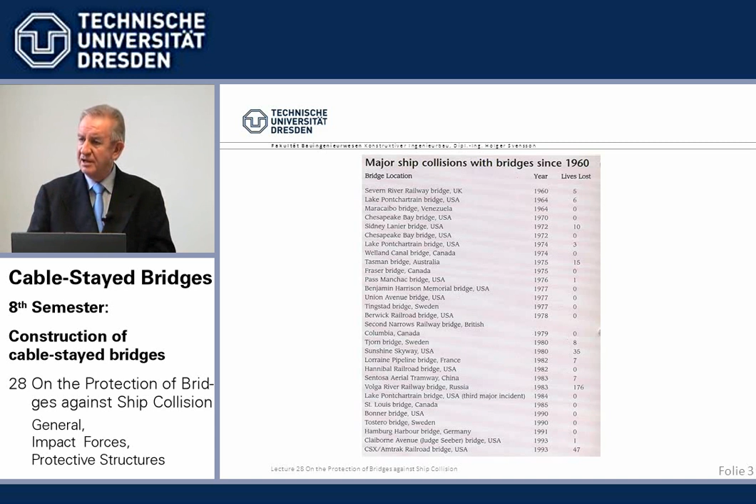Recently, when we were designing the bridge alternate for the Fehmarn crossing across the Baltic Sea, the main bridge, this was a main item, and they had very high forces there, as Pedersen will show. The design was quite a bit driven by ship impact conditions right in the middle of the Baltic Sea, just as one example. So we have to take this very seriously.

The main item, of course, we want to know what are the forces we have to design the pier against. When I came to this business in the early 80s because of the Zárate-Brazo Largo bridges in Argentina, we'll see an example. I looked into the literature and found there's nothing, virtually nothing.

There was Minorsky, who, for if two ships run into one another, calculated a force proportional to the volume of the deformed steel, which may be very nice for shipbuilders, but we poor engineers can't do much with that. There was nothing.

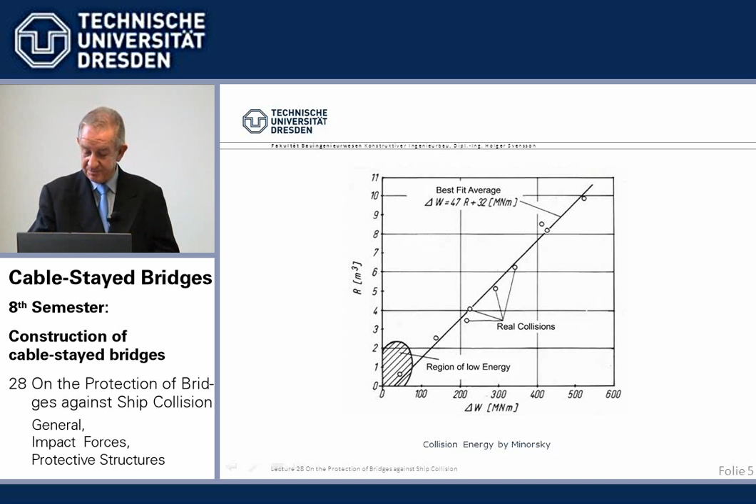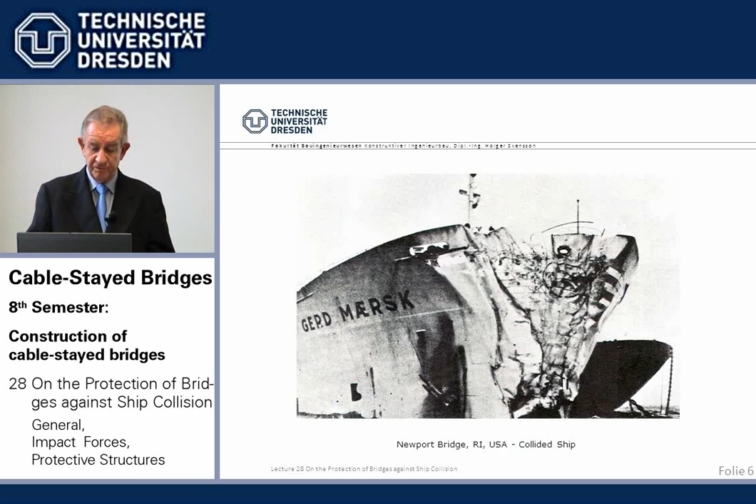As a typical example, I take the collision of the Newport Bridge, Rhode Island. We see here the heavily deformed bow of the ship, and we see here the slightly spalled, damaged pier of the Newport Bridge.

That's a major suspension bridge. Very sturdy piers. The bridge survived, and the ship at least didn't go down.

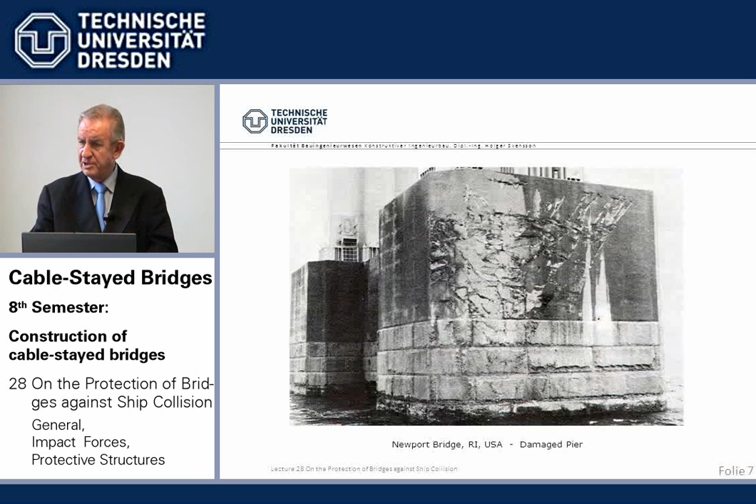And now, for this typical situation, a steel ship which can have plastic deformations and a very rigid pier, we'd like to know the impact forces. There was nothing.

It so happened that I came upon publications in my hometown, Geesthacht, near Hamburg, where the atomic power ship Otto Hahn was designed. At that time, in the 60s I think, they wanted to have commercial ships with atomic power stations. Didn't work out later, but anyway. For these atomic ships, one had to design some protection for this atomic power station.

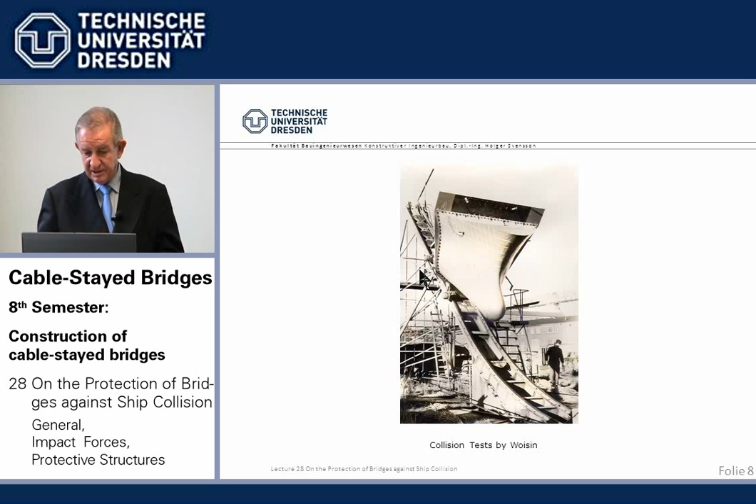There were tests made by Mr. Woisin, whom I got to know very well, at the Howaldtswerke I think, in Hamburg, with models. You see the man here, and those were heavy, expensive models. They were let down an inclined plane with a given speed, and the impact forces were measured. Lots of publications, and something like that always came out.

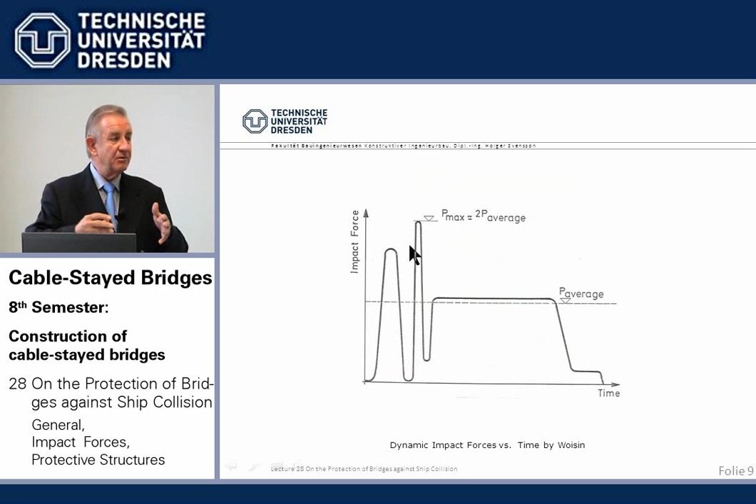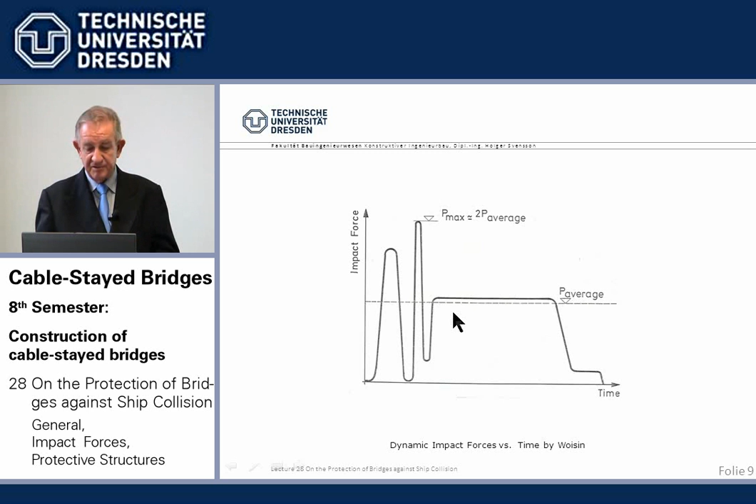There's first a fluctuation, a very, very short period. Basically, I say that's the pre-buckling. Before the thing buckles and so on, it stiffens up, but it's very short. Then, for a longer period of time, we have the average force. And that's where we all decided, yes, that's only a dynamic effect. We have to design for the average force.

How big is the average force? Then, with my simple mind, I looked into the results and sketched something and came up with the relation that the impact force is proportional to the ship size, deadweight tonnage, measured in deadweight tonnage, simple, with some factor there.

That was it. And then I said, okay, we use this formula, and then of course we have a certain scatter, because it depends on the make of the bow of a ship, whether it's very stiff—take a warship, a very stiff bow—or whether it's very soft, say an oil tanker.

So we said, from all these tests and what have you, and Mr. Woisin, who was a ship engineer, helped me there a lot—we said, okay, this plus or minus 50%, depending on the type of ship. Beautiful. And that gave the first formula to give something.

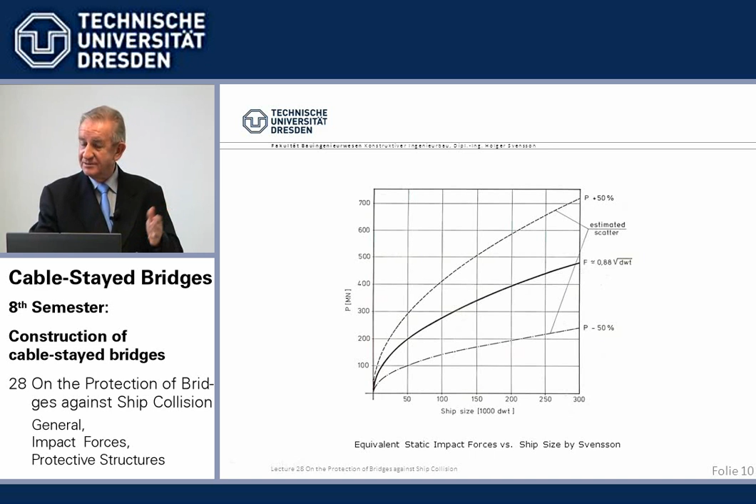And then we worked together in the United States on AASHTO. I was on the AASHTO committees and so on, and my good friend Mike Knott became in charge. And then they said, well, this plus or minus 50%, that's all too difficult. We use the 70% fractile, and then we have that all well covered. I don't believe it, but okay, it's easier to calculate, I agree.

So then the formula became 0.98 instead of 0.88 times deadweight tonnage, which is basically the AASHTO formula.

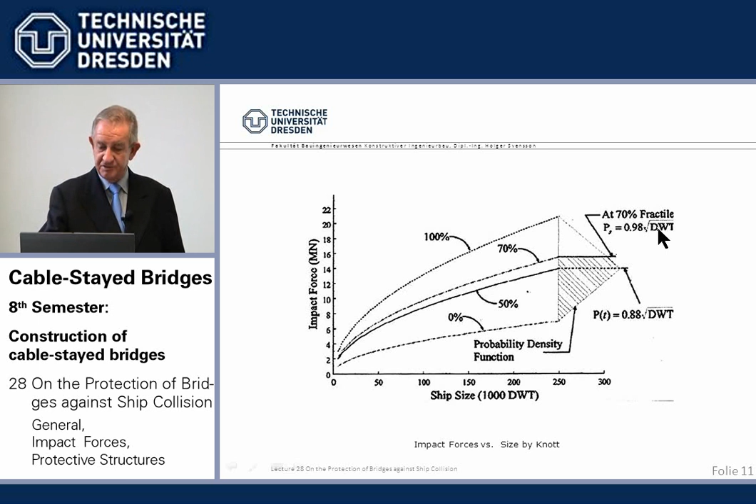And there are other formulas taking into account the speed. The speed of the ship has a little influence, not very much, because the bigger the impact force for a given ship, the longer is the plastic area of deformation. The work which has to be done—there is kinetic energy which has to be killed by inner work of plastifying the steel.

The old Eurocode used basically the same approach. Then Mr. Pedersen came up, I think in 1983, with some theoretical calculations, and he came up with double. So there's a big discussion today about who's right, AASHTO or Pedersen. As usual, people are careful, and the old Eurocode switched from what we did for AASHTO to Pedersen.

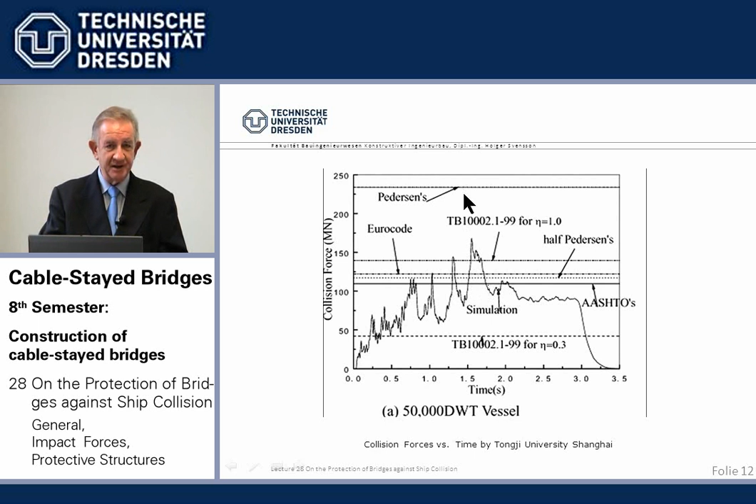What Tongji did, they modeled this type of ship's bow with all the decks and everything, and they modeled the bridge pier, and that was the outcome. Looks not unreasonable to me.

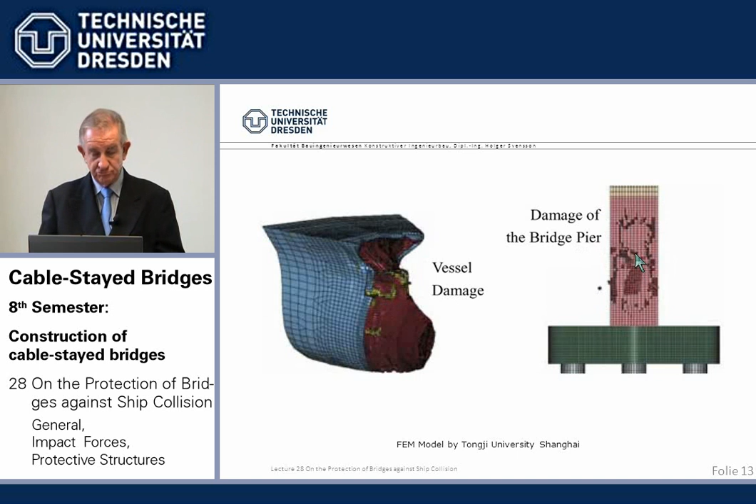Now they evaluated that for other things. They said, for example, well, good enough if we have a real solid wall, like I showed you for the Rhode Island Bridge. But normally the piers are a little bit flexible. What happens now if we add a parameter, flexible piers instead of rigid? Here we see a rigid wall would give these forces over time, and certain flexible piers at the pile cap would give, at the peak, half of that.

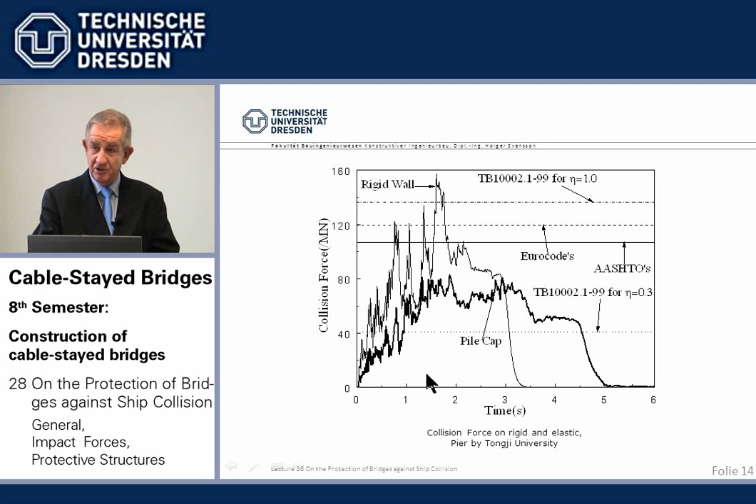So it's quite important, if you want to reduce the forces, to take into account the flexibility of the foundation, especially if you are on high piles. If you have a solid pier on rock, not much giving. But if it's on long piles, it helps. Every little bit helps to keep the price down to win the competition. That's the name of the game we are talking about here.

Then the other thing which I briefly indicated in the beginning, the time period. We have here one local peak, then we have a local mean peak, and then we have a mean over time, a general one. We decided, basically, at that time, to use the mean over time. And you see already, if you say no, we use the peak instead, then you are where Pedersen is against what we have. So it's open to interpretation.

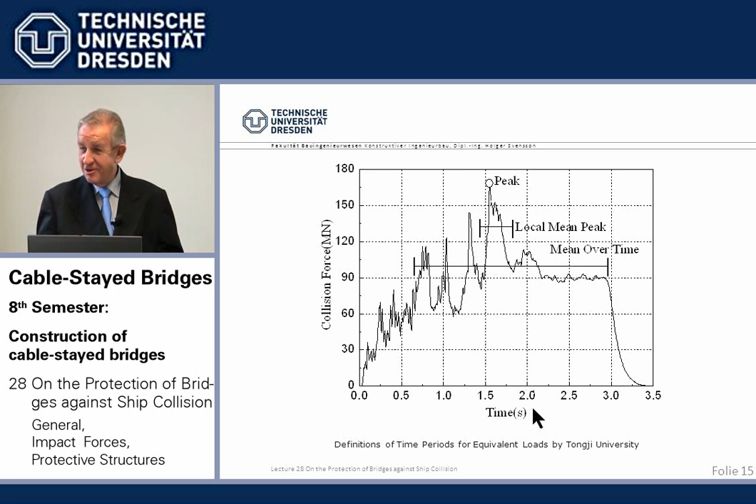And if you compare, taking impact velocity into account, collision forces, and see the difference between the absolute peak, the local mean peak, and the global mean peak, there's already a factor of 2 in there. And then if you compare the old Eurocode and AASHTO, well, I would say, taking into account that we don't know what type of ship is hitting there, it gives us at least an idea what forces to apply, and it has to be specifically stated in the tender documents.

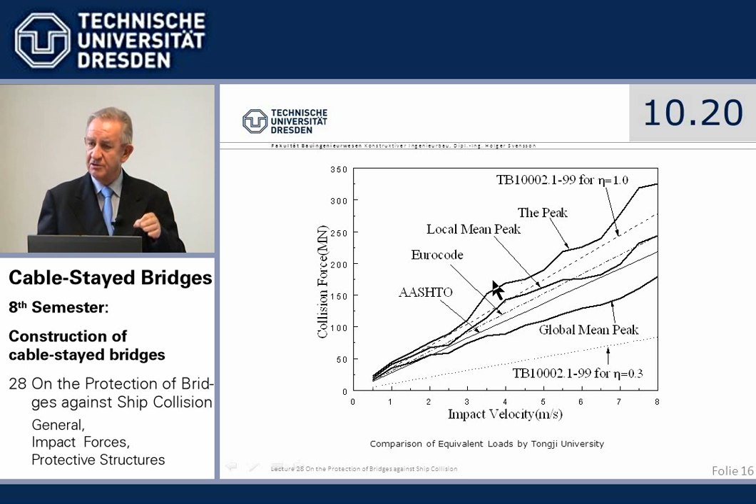Once we have established, in a way, the impact forces, then of course there come in all the probabilities and things like that. I'm not going into that. That's in, for example, AASHTO and other codes.

What can we do about it? How do we protect our bridge against the consequences of ship collision? First of all, highly recommended, place the bridge and the piers out of reach. If the ship can't reach the bridge, it cannot do any harm. Simple, isn't it? An example: the old Tjörn Bridge in Sweden, an arch bridge, 278 meters, nice.

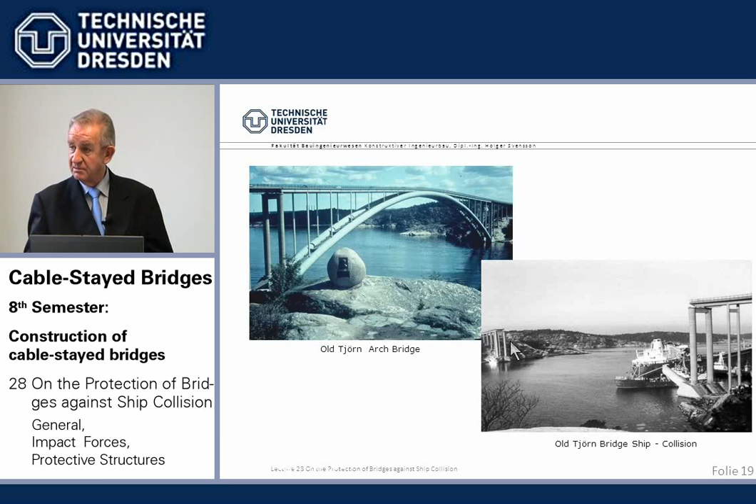However, a ship could reach the arch where the arch comes down. Well, that's the old Tjörn Bridge, and in accordance with Murphy's Law, what can happen happens. There was a ship running into the arch and taking the whole bridge down. No. Okay, now we've learned that.

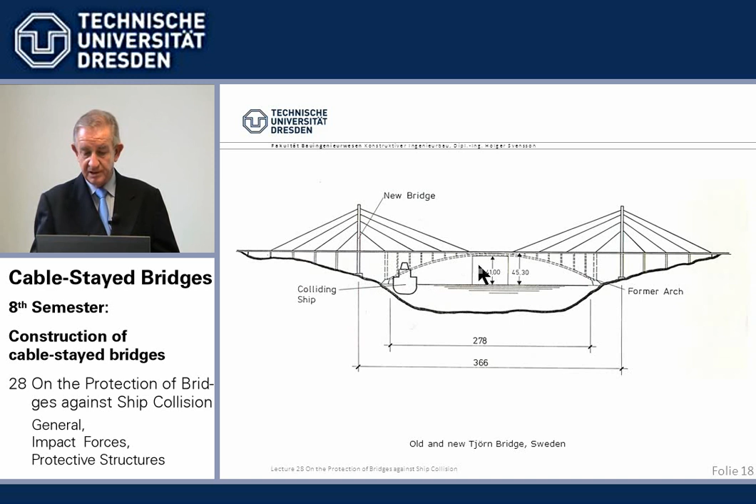So we place the new bridge out of reach. We use a cable-stayed bridge with piers safely on land, and you see that the same ship cannot reach any part. This is the new Tjörn Bridge, done by Krupp. Our alternate wasn't successful.

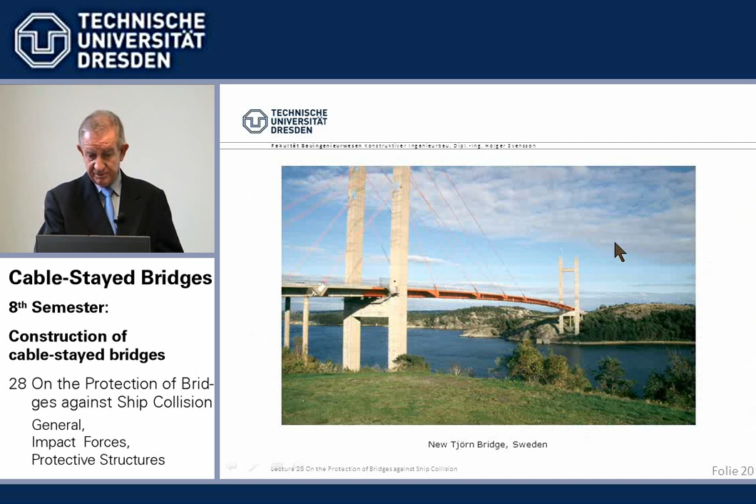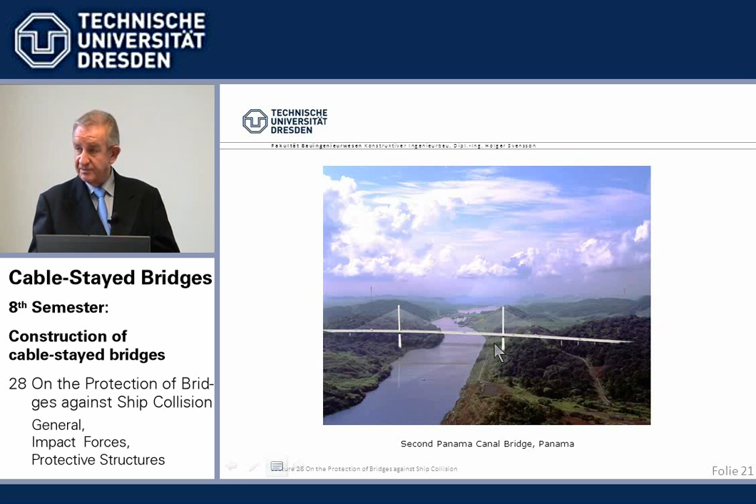Another of our bridges, the second Panama Canal Bridge, of course a bridge across the Panama Canal. There's one overriding consideration: thou shalt not hinder the ships in the canal. Nothing else interests the people who run the canal, who pay for the bridge. So it's very high, very far away, even accounting for the widening of the Panama Canal currently under work, so that it can be taken up easily. High enough, wide enough, so no ship in the Panama Canal can reach the bridge.

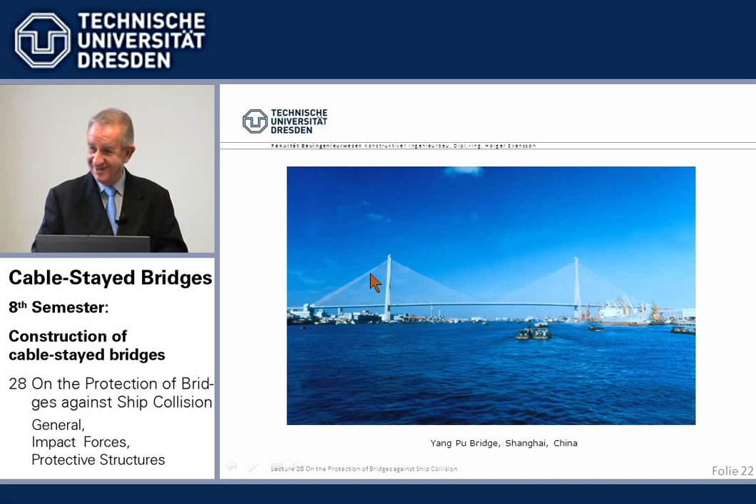Yang Pu Bridge, Shanghai, was a world record at 602 meters in 1994 when I was checking that for the World Bank. The 602 meters came from the condition that no ship must be able to reach the bridge. We wanted it out of the navigational channel, out of the water - think of the drunken sailor. So that's where the 602 meters came from, and here we see the foundations being built, with also a little seawall against it.

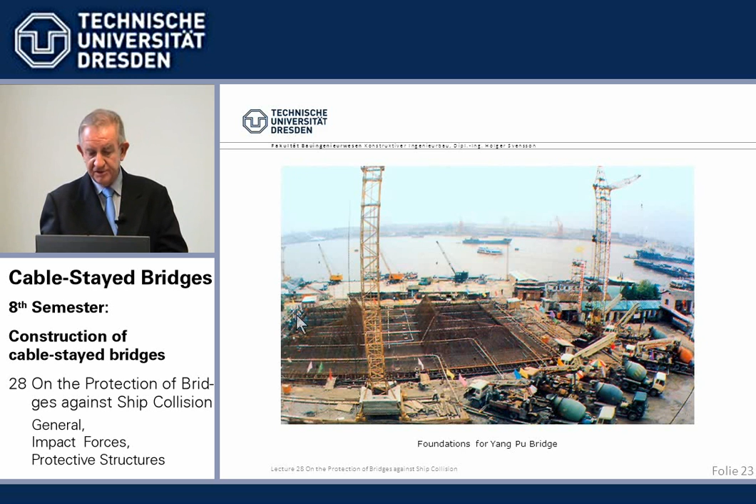Stonecutter - not the one you know, but our design, which came up second. It still hurts, we would have liked to do that. It's a nice bridge.

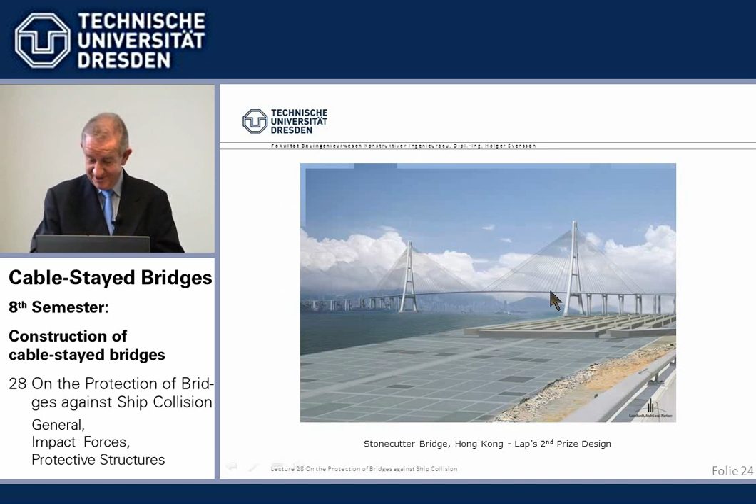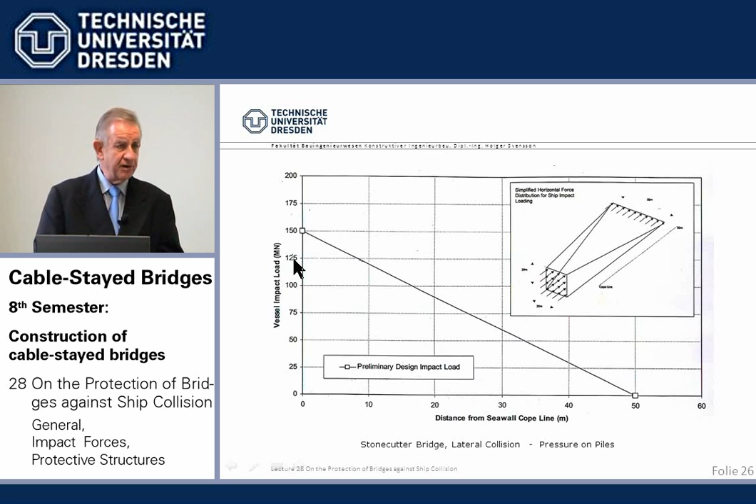Looking there, we also had a condition: you can put it ashore, close to the shore, but not in. It's on piles. Now, what happens if a ship runs into the seawall? Well, you can do it with finite elements, and you find a certain force being exerted through the soil, the seawall, onto the foundation. It's nothing really serious, but it had to be shown - it was in the tender documents, so it was investigated.

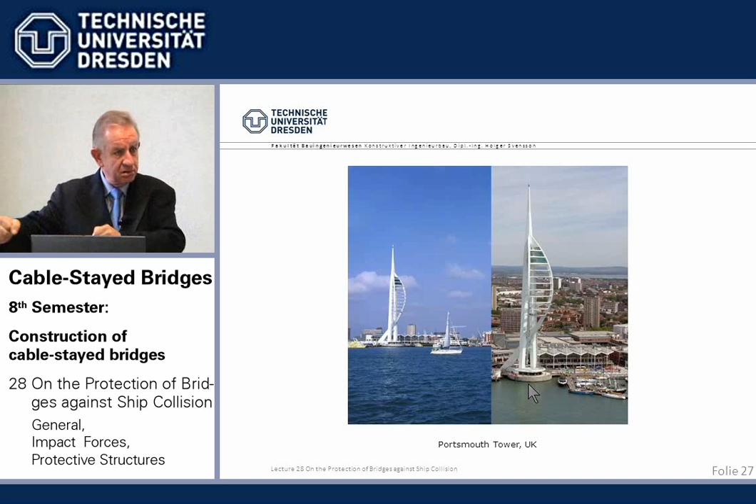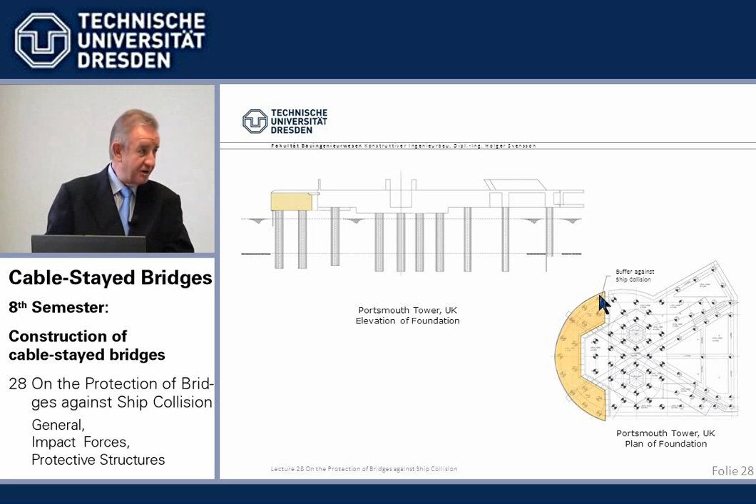Well, it had to be more or less in the water, so it could be reached by ships, and especially there are some ferries running to and fro. Even if a ferry loses its steering wheel or engine power and is drifting under the wind - ferries are high, we don't like that. So what was done was: we make an independent protection in front here which can deflect, making this sort of a buffer. So even for a building, that's why I brought it here, it may be necessary - if it can be reached by ship, we have to protect it.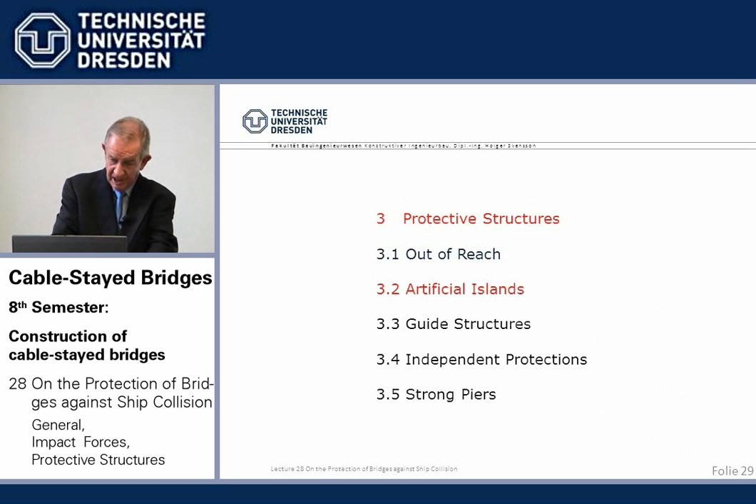So, out of reach - we put the foundation out of reach, but with an artificial structure. The next possibility is artificial islands. If we can't put it on land, then let's put the land around it, if possible.

Here is an example, the Houston Ship Channel crossing - you've seen that in detail. It was possible to place this artificial island around. It works very nicely; if you put riprap stones on top, it holds for a long time.

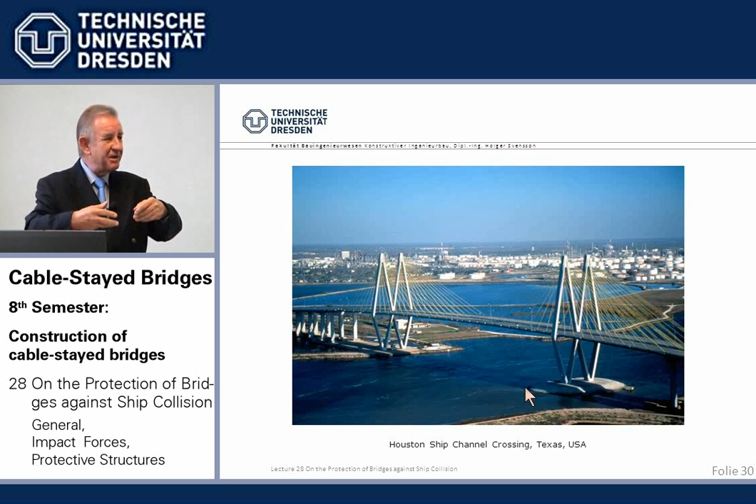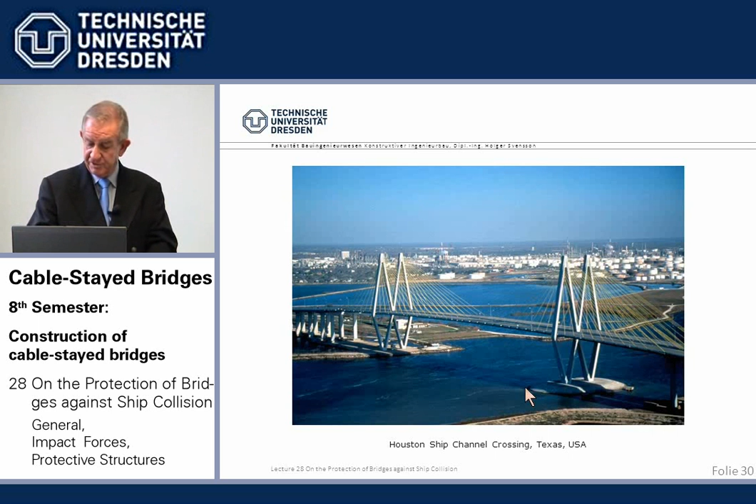We can also try to guide the ship away. If it's going in the direction of the pier, we can use a guide structure to guide it away - not a frontal blow, but guide it.

One example is the Kronprinzen Bridge in Berlin. Behind there is the new main station - Calatrava design, very nice, very involved. However, it so happened that during the design, they forgot all about the ships which run underneath the bridge. Calatrava won the design, the bridge was built, and only then did people say, what the hell, we have these big ships running there on the Spree.

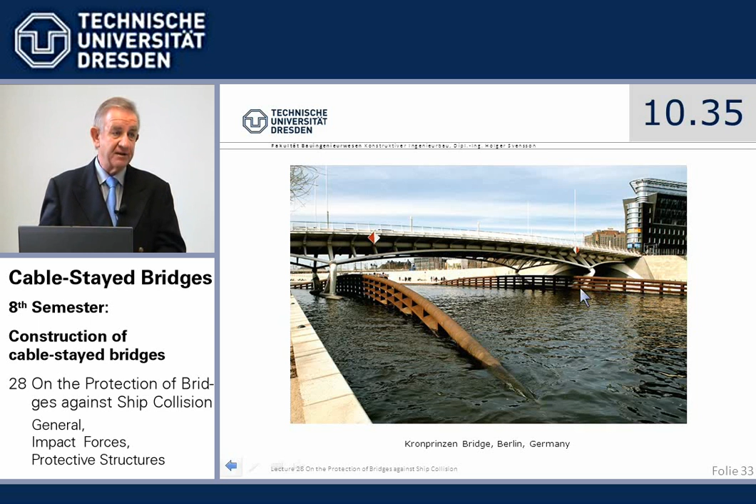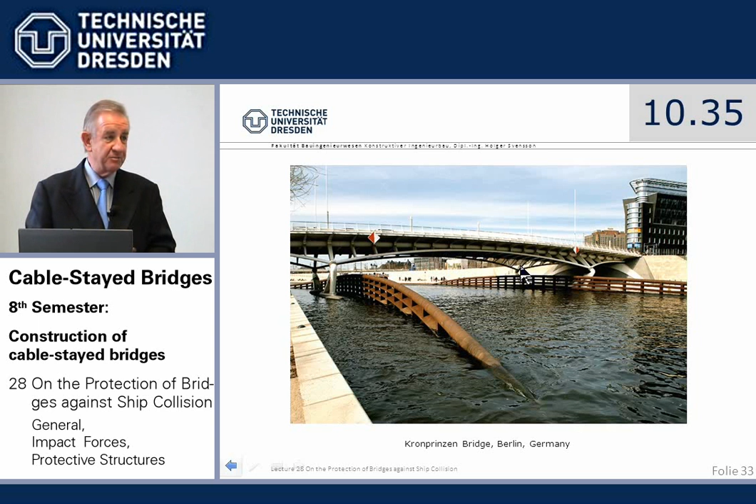Remember the first arch bridge I showed you - these arches can definitely be reached by a ship. So, well, they made some guide structures, very nice, but the result was we have nearly as much steel in the guide structures as in the bridge itself. If they had considered from the beginning that there must be no structure in this part, beautiful - but they forgot all about it. We're all excited about Calatrava's beauty, and so they had to pay for it later. But it hasn't come down yet, and so far that's a consolation.

Another example, the Neckar Bridge in Germany. There was a redesign, and people were aware that although there are no ocean-going ships on the Neckar River, there are enough vessels that could run into the pier and take it away. So some guide structures were installed, decreasing the navigational clearance from about 20 to 12 meters, but okay. So that was an example.

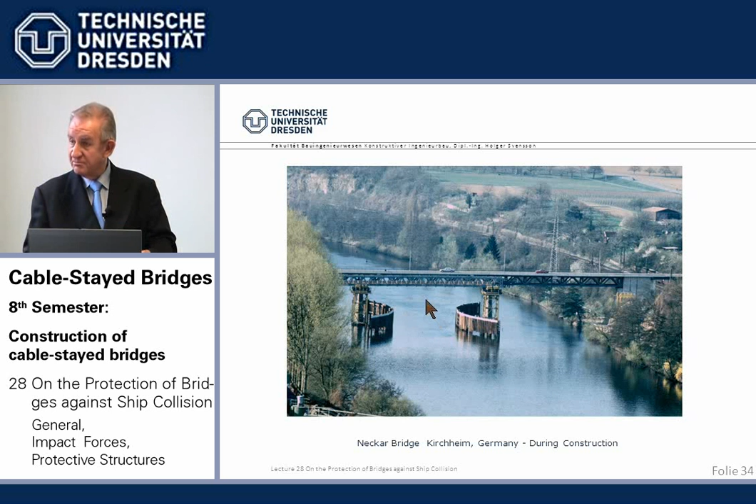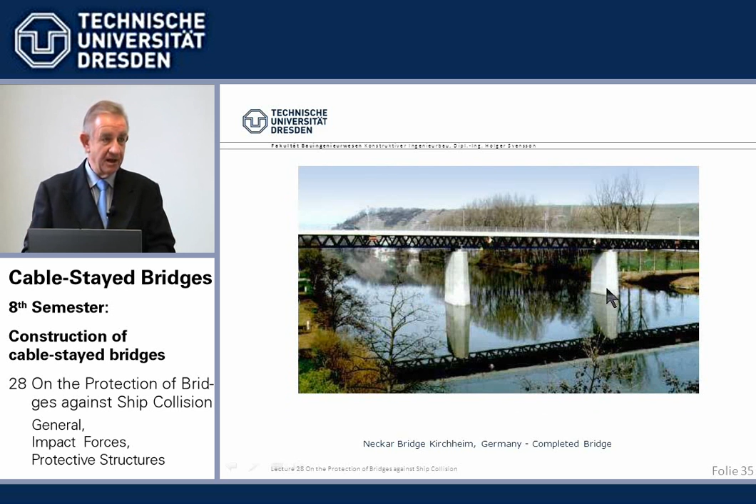In the final stage, when all was said and done, we have the strong, nice piers, and they can take a hit from those Neckar boats which run there. All very scientific, don't laugh.

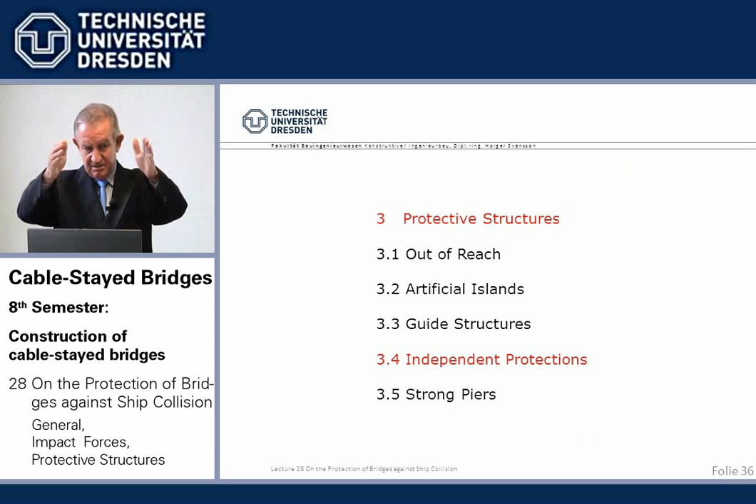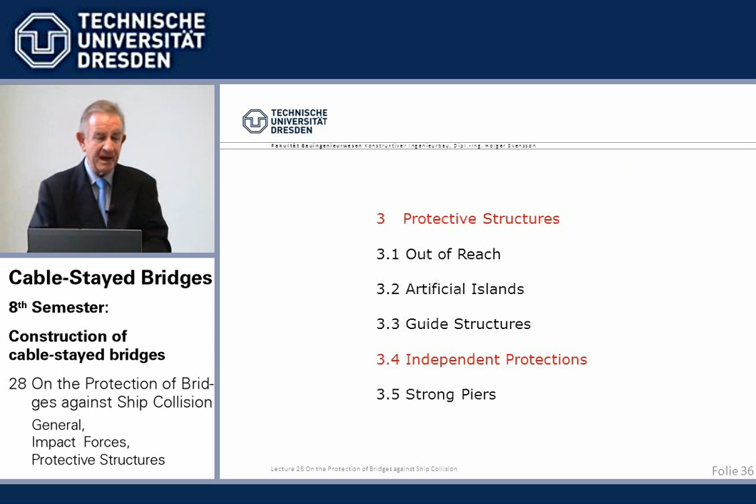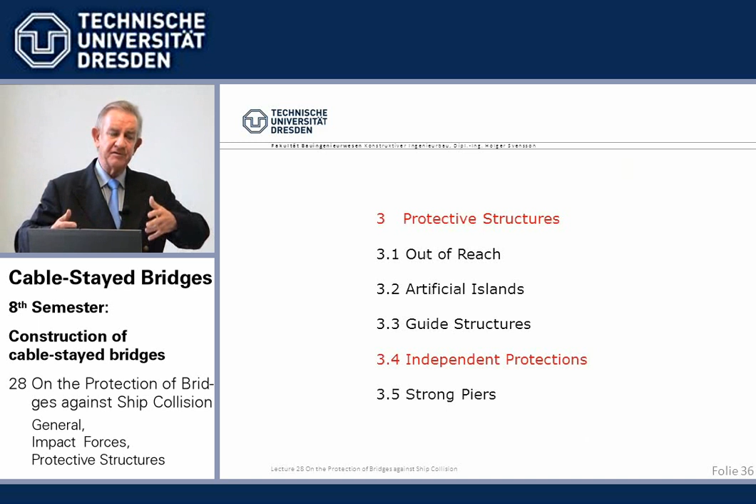Now we come to independent protections. Basically, it is helpful that we have the load from the weight of the bridge on the piers against a hit - this vertical compression always helps to take up a moment. That's perfectly clear. But sometimes it doesn't help, with very bad foundation conditions. We can't make it wide enough, and so we can't make it strong enough. We have to make an independent protection.

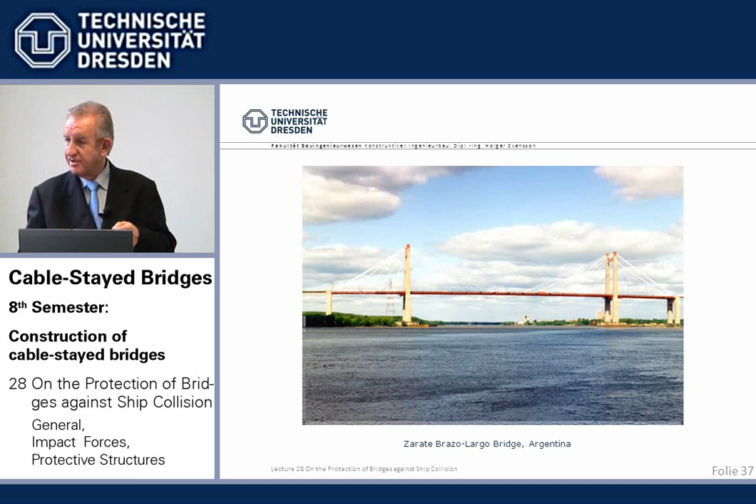The Zárate, Brazo Largo bridges in Argentina, across the Paraná - we've done several bridges there. After the bridge was long done, the authorities said we've forgotten all about ship collision. So it was tendered, and that was the reason for me to start working on this 1980-82 ship collision study and try to find out something. What came out, after I had determined impact forces and things which weren't there, was that we needed something strong. The bridge was done, we couldn't reinforce that.

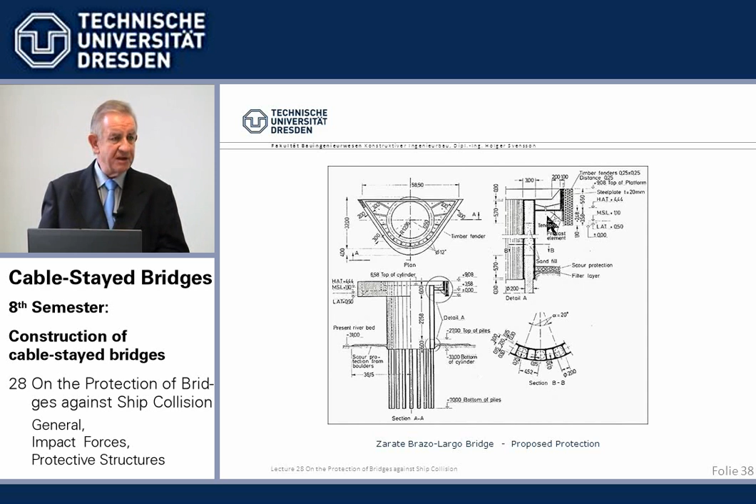So we said, for the piles with bad foundations, we'd use a circular concrete pile with a deflecting top, which if the ship rams it, takes it away, and we use some timber fenders for the smaller boats - all very nicely considered. The contractor for whom we designed the original bridge, Techint, put a price on it, and everybody seemed to be happy, except the state said, wow, that's much too expensive.

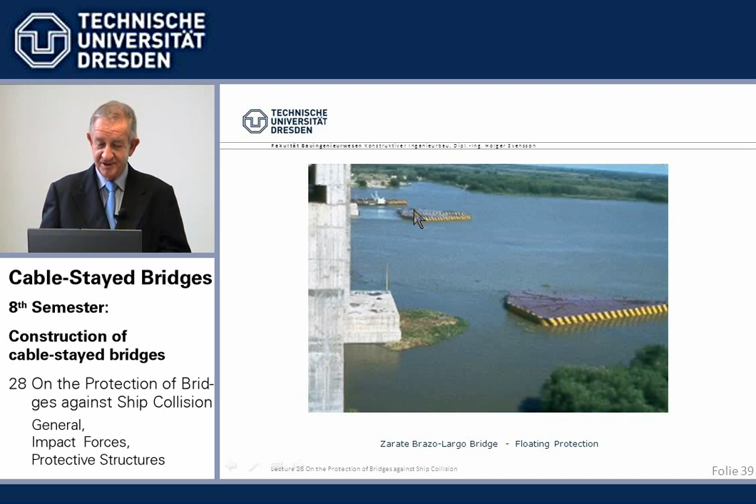So they used floating protections instead. That's what is in there, which I call an administrative protection, but I have not much trust in floating protections. To start with, if you don't have a very special sort of bulbous bow, if you have a raking bow or pontoon, those will just run over this floating protection. Plus, it's very difficult to inspect the moorings at the bottom of the river and all that. So I say it's no good, but they had something in the books and said we've done something for impact protection, but it doesn't work.

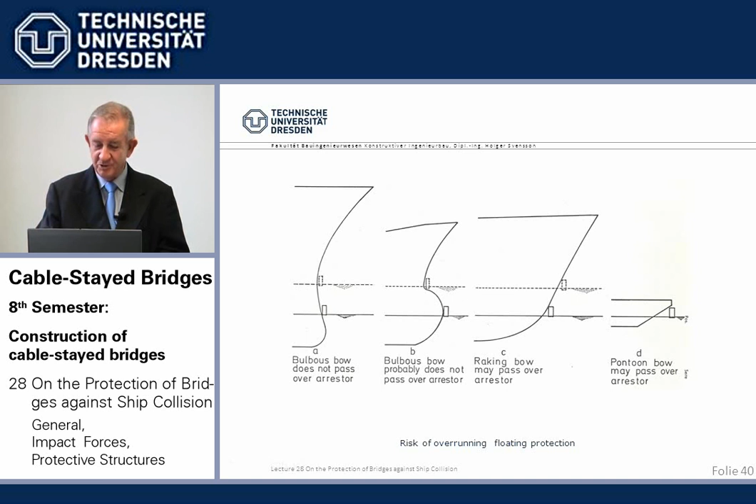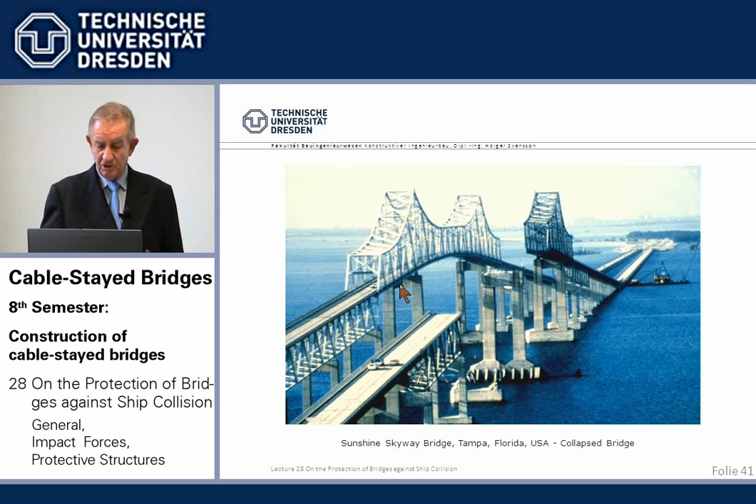I showed you that unfortunately our design, steel composite, lost against Jean Muller's concrete alternate, and that's his concrete alternate. However, we were then involved, it was just after the Zárate Brazo Largo investigation, with Mike Knott, I worked, who made then the AASHTO. And of course, since this bridge was caused by a ship collision and 35 lives were lost, the protection against ship collision for the new bridge was taken very seriously.

No administrative protection here. We used what we call in the US belts and suspenders - we did it in two ways. First of all, the towers received protective islands, and the side span piers received dolphin protection. And then, for good measure, for the main towers, in addition to the artificial island, there was also a major dolphin. This hopefully will prevent another downfall.

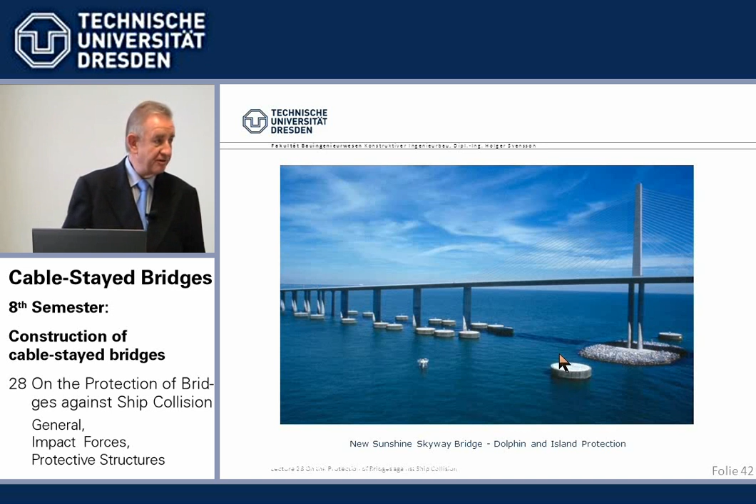We did the dolphin similarly as I had originally considered for the Zárate bridges. Here we have good gravel on the bottom of Tampa Bay, so we don't need piles, but otherwise it's sheet piles basically with a concrete top filled with crushed stone, timber fenders around, and that was something like 1985, and nothing has happened, thank God, to the bridge since then.

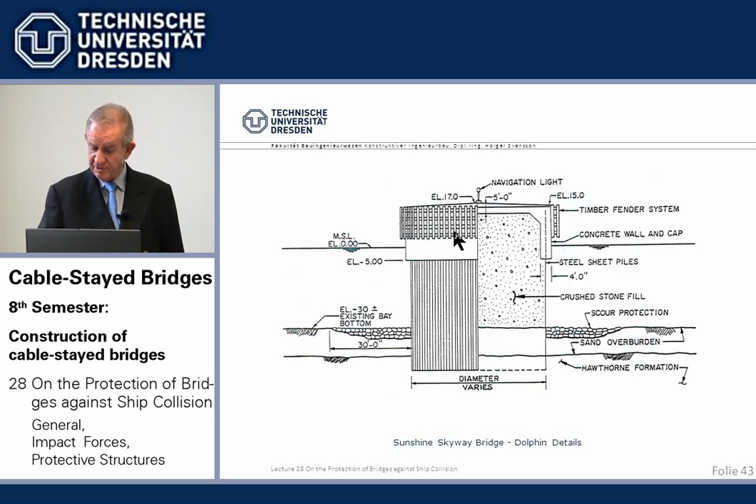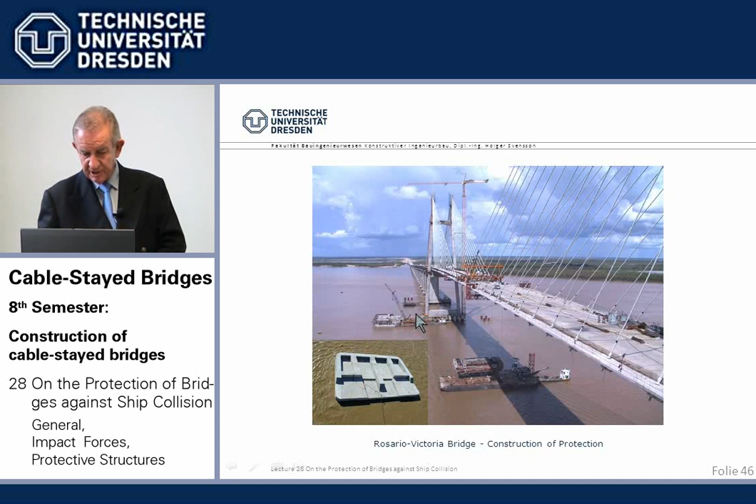That's a concrete pile cap, bigger upstream, lower downstream, because the speed of the ship against the current is smaller than coming down. And we used, we see it here, that's an enlargement. These things were then installed, and they work by plastic hinges in the steel pipes.

So again, the kinetic energy of the ship, 1/2 mv squared plus 5% of water, has to be taken up by internal work, which is basically, if we use rotational hinges, the rotational resistance times the angle. Which means, if I have an angle here, I need quite some distance - this has to be considerable to enable that plastic hinges are formed in the steel pipes.

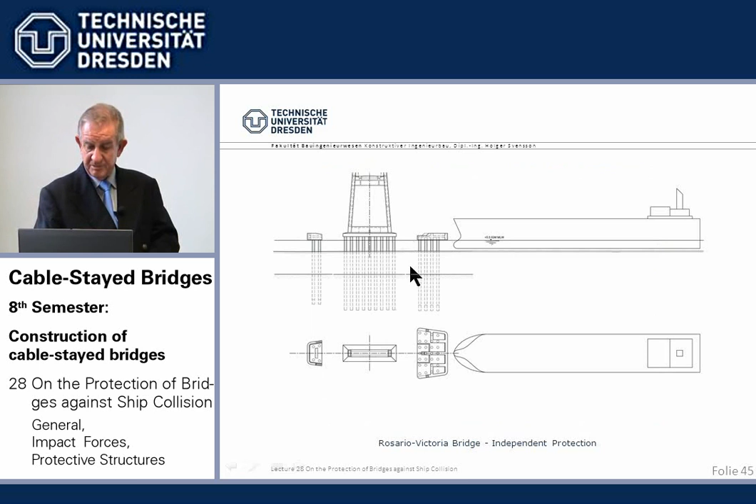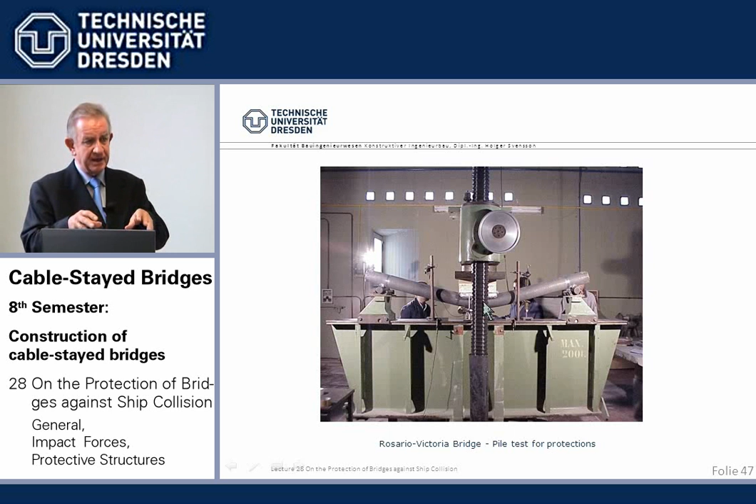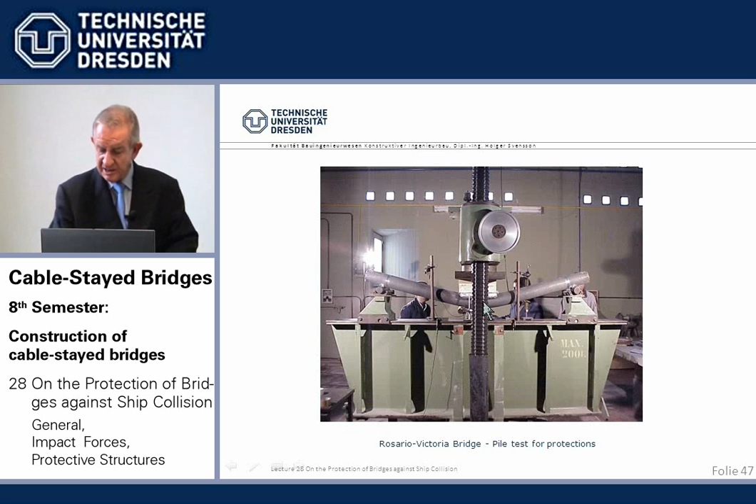That was all taken into account, and then the steel pipes were filled with sand, which increases their buckling capacity. If you try to bend a hollow steel pipe, it will somehow buckle, and you do not get the full theoretical plastic capacity. However, if you fill it, say, with sand, it cannot buckle and you can develop it. There were all these tests made, and so we proved that the kinetic energy of the ship can be taken by internal plastic work.

Ship collisions can take place very well with the side spans as well as the main spans. Think of the drunken sailor.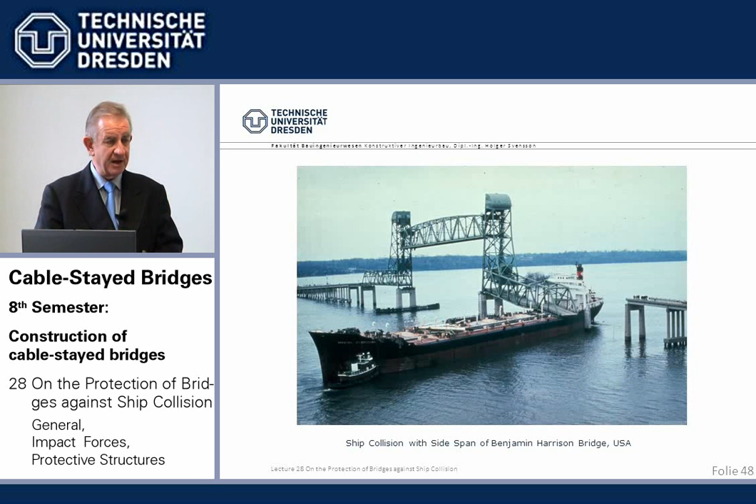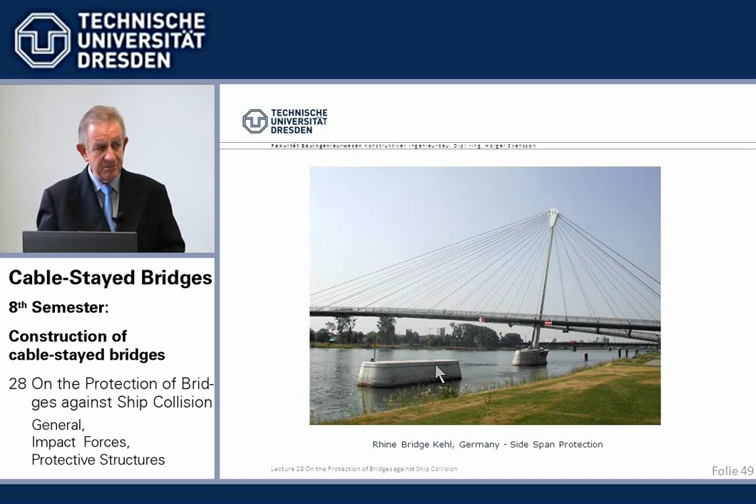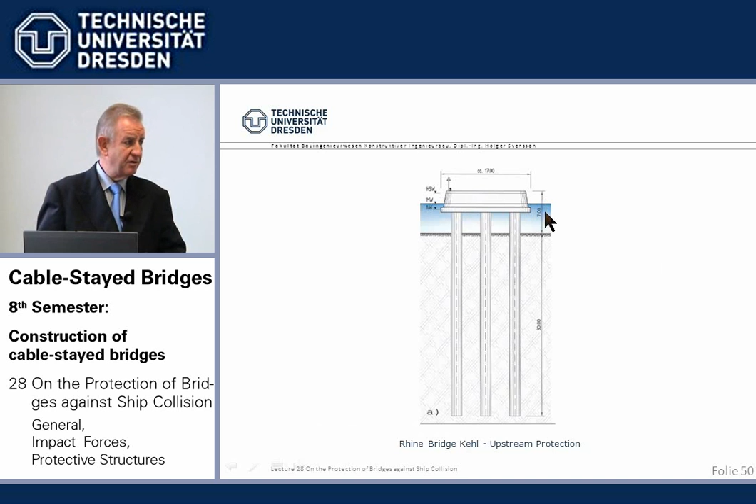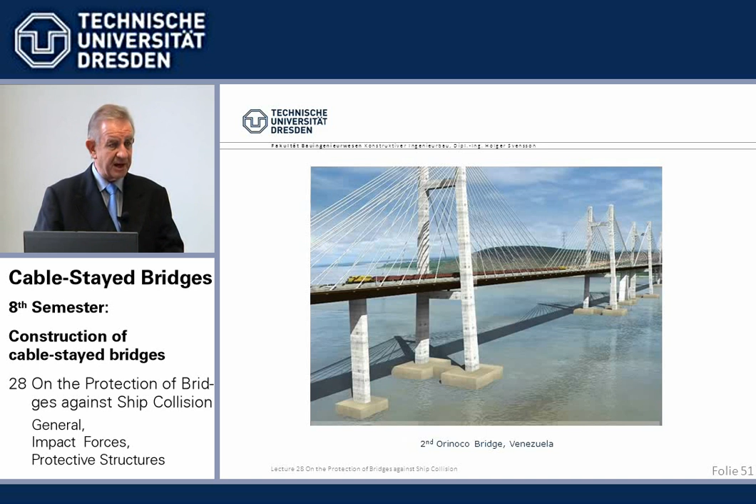The Kehl Bridge I showed you formerly, where the pier is rather on the side, has upstream a rather solid protection, which basically has to be on piles with a pile cap to take the force of a Rhine River ship. Second, the Orinoco Bridge in Venezuela, I showed you - similar problems as in Paraná, long piles, 10 meters tied up and down. So sort of independent protection. You see, it's not connected because we have these deep piles - independent protection around the piers.

The bridge is done, to the best of my knowledge. This is not installed - Hugo Chavez is a little bit short of money currently, so hopefully later it will be paid. For the time being, the bridge is vulnerable against ship impact.

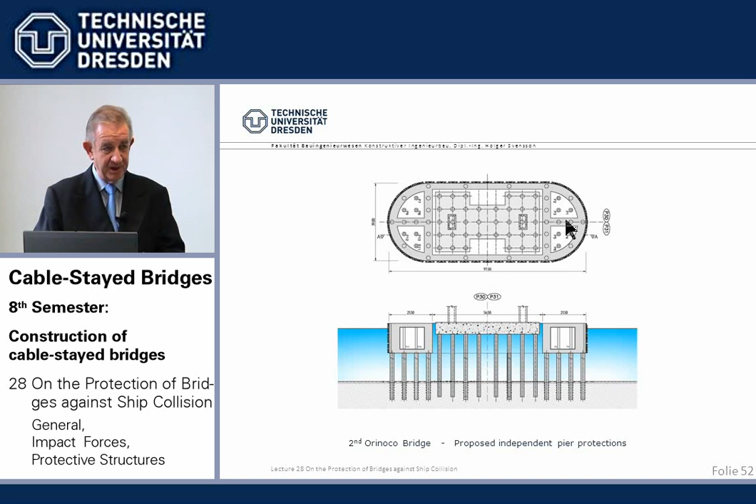So finally, we can strengthen the piers. If everything else fails, or if that is the most advantageous, we don't take it out of the water, we don't have protective structures, we just make it strong.

One interesting example is the Galata Bridge in Istanbul. Everybody of you who has been in Istanbul has gone across the Galata Bridge - that's just in the center of the city. For hundreds of years, there was a floating bridge because it's very bad soil conditions. We were the first ones, with Thyssen, mainly ThyssenKrupp, to design a fixed bridge there, the Galata Bridge.

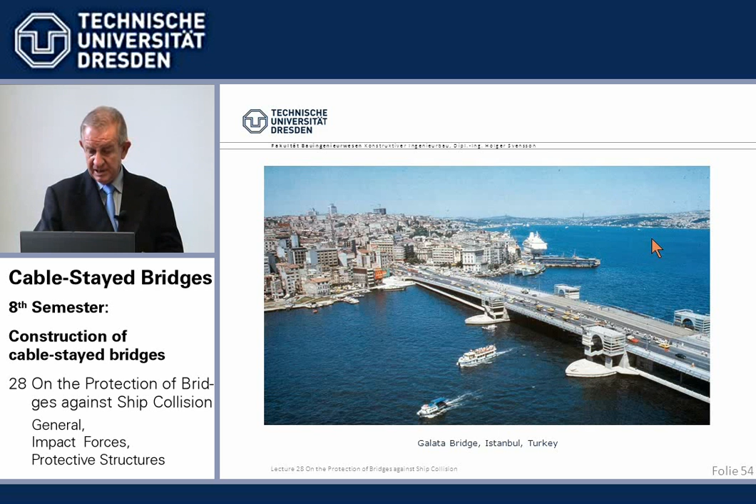That's our design there. It is, I have not mentioned, a movable bridge - it's a bascule bridge. It's not very often opened, but it has to be opened, especially because warships are lying here, and the navy insists you can get in and out. So we have the problems of the very deep piles, of course we have the bascule bridge, we have heavy earthquake, and we have ship collision from these warships going in and out.

So these are contrasting requirements. For earthquake, we want it flexible so that it isn't stiff and it takes the forces of an earthquake. For ship collision, it has to be strong, it has to resist.

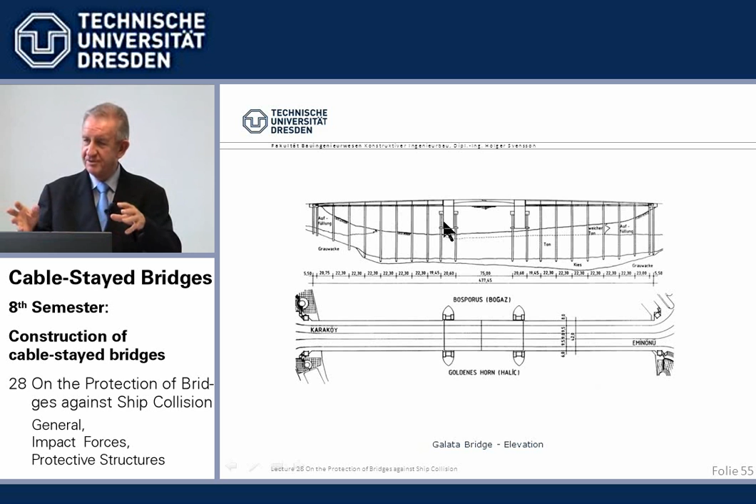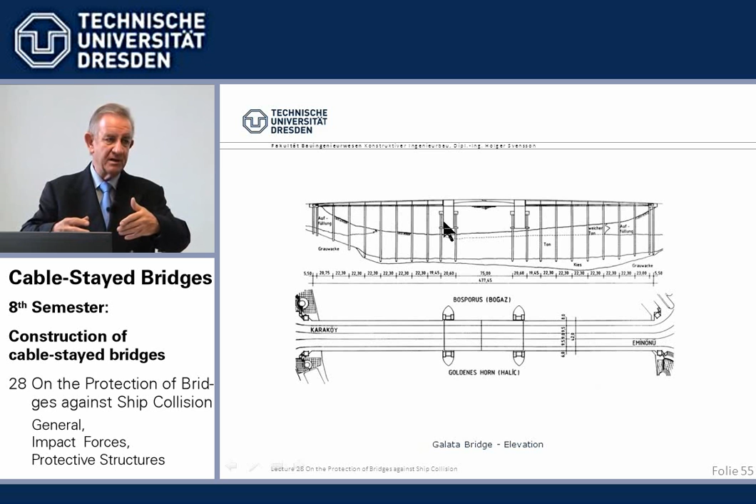There was then a compromise found, and I remember Dr. Kovac, who did all the dynamics for me here, did the design, and we discussed it, and he had beautiful animations where he showed what happened during an earthquake for this design and how it can take ship impact. So it was a compromise between the contradiction of being flexible against earthquake and strong, sturdy against ship collision.

In addition, it was said, well, the bridge is low over water, and what happens if, say, a warship or major ferry runs into the beam, not hits the piers, but runs into the beam? The requirement was that these side flaps don't fall down.

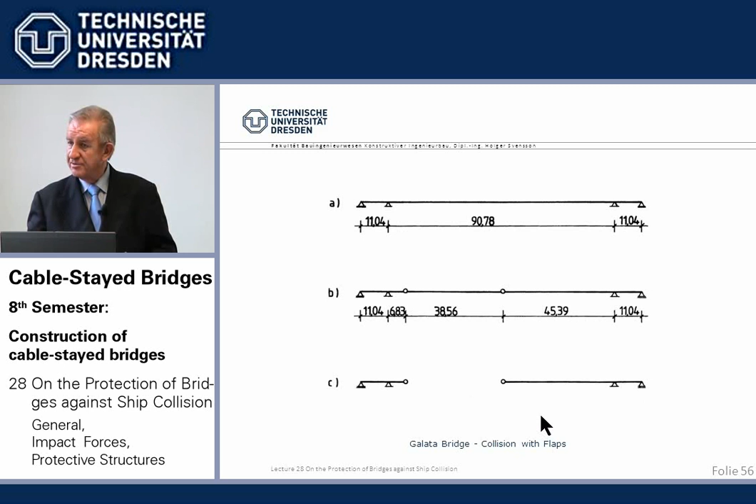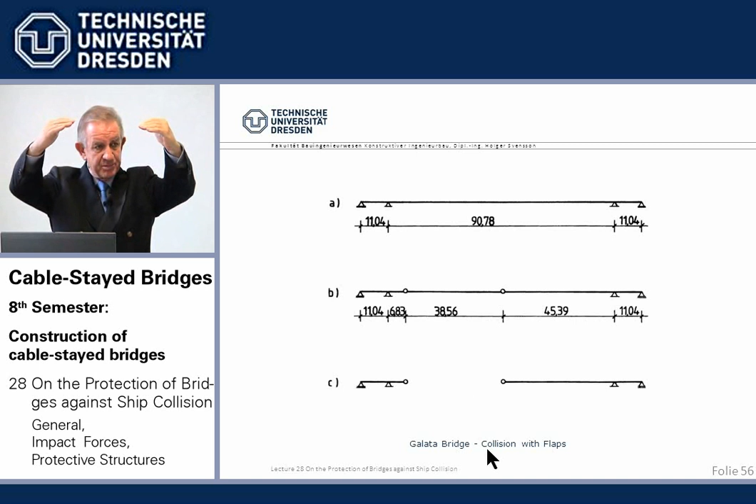So it was assumed that when the ship hits, the lock in the middle where the two bascules meet gives up and slides out, and this remains. It was shown that this is also at least stable, so the whole bridge didn't collapse, but only this part. That was an additional story about how to protect the superstructure or beam of a bridge against high standing parts of a ship.

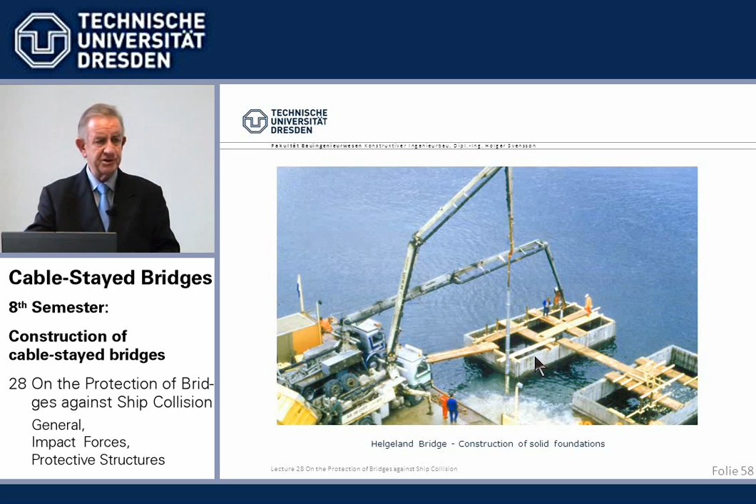The Helgeland Bridge, I showed you 30-meter deep waters, deep water on rock, precast boxes filled with concrete, strong enough that the ships which are expected in that fjord in Norway can run against.

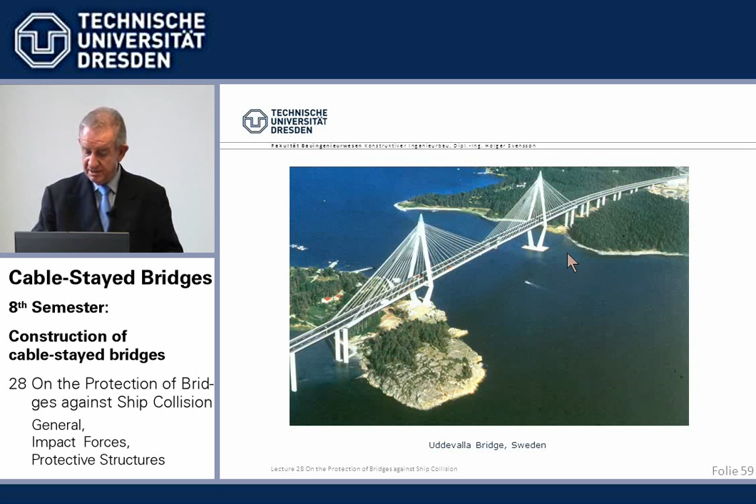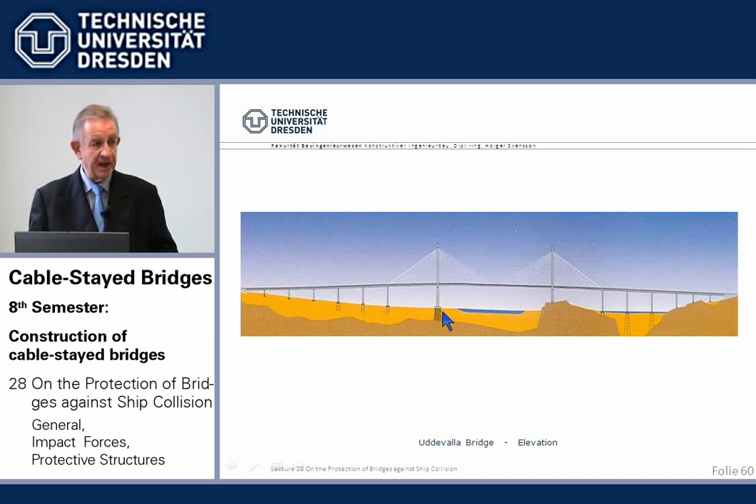Similar, the Uddevalla Bridge in Sweden, we have here high water. This is out of the water, but that's in. And if we look, here's low water. The one which we have just seen is this one where the water is higher. You see there is nothing particular, just the pile cap, and we calculated that this type of foundation on rock can take the impact force from the ship to be expected there.

Now, to sum it up, the problem of ships colliding with bridges is very real. History shows that regularly, definitely every year, worldwide maybe every month, ships collide with bridges, and often it costs lives. Sometimes it makes it into the news, especially when there are more than several dead. It regularly is a news feature from all over the world. So it's a real danger, not just for cost, but for lives. We have to be careful to make sure it doesn't happen.

Also, it can have an important impact on the design of the bridge, because if a pier in deep water is very expensive to protect against ship collision, it may be overall more economic to widen the span, gaining from less cost in the piers against more cost in the beam. That is very real, and if you design bridges, say across the Baltic Sea where you have big sea-going ships, it can influence the design. If you forget it, your design will probably not win, because in the end it's too expensive. So remember ship collision from the very beginning, if possible.

Now, the bridge pier itself, which you strengthen, cannot deflect very much. Oh, I'm too long. So we are done anyway. I'm sorry, I was wrong. Yes, I thought 11:05. It's 10:50.

Okay, so you have to have an independent support which must have a way to deflect by yielding. Okay, thank you very much.